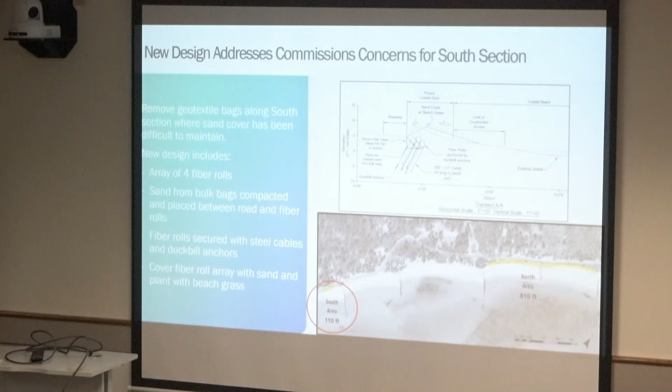We will take the sand out of the geotextile bags and use it between the road and the first 2 fiber rolls, compact it there, and use it as a buffer between the edge of the road and the fiber rolls. The fiber rolls will be anchored in place using steel cables and duckbill anchors. That's a typical way of anchoring them in place. And then once they're in place, then we'll cover them with sand, restore the dune, and plant it with beach grass.

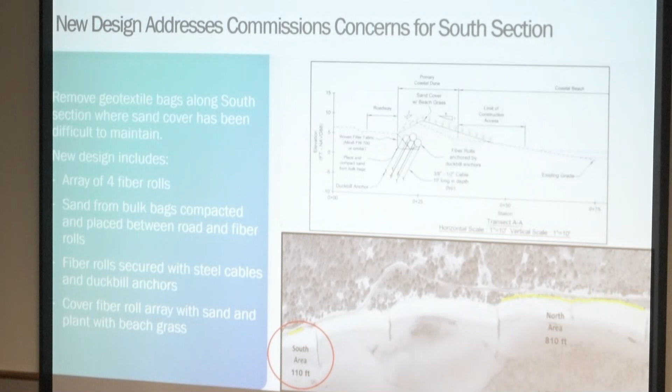A little bit on schedule, construction access, and resource area impacts. So Great Island Homeowners Association is planning to do this work to replace the geotextiles with the fiber rolls this fall. They do hope to be able to beneficially reuse some sediment that's being dredged from the Sweetwater Creek project, and they'll use that for the sand cover on top of the fiber rolls. That is a project that has been permitted separately by the proponents of the dredging project, and they do have permission to bring the material from the dredging project across the dune to Great Island Road. So from there, they'll place it in the pull-offs, and we'll use it to place on top of the fiber rolls, and also on the end of that northern section of the geotextiles, where there needs to be a little bit of cover added as well.

Construction access is shown in that upper right-hand graph. It's really essentially the same as what we did with the geotextiles—coming onto the beach from Great Island Road in that little red hatched area, and then working along from the beach to place the fiber rolls. So it's really identical to what we did before. Same with the resource area impacts.

So the fiber roll array is 110 feet long. There will be impacts to 2,031 square feet of coastal dune and 2,047 square feet of coastal beach. Those impacts to the beach are primarily from construction access out on the seaward side of the fiber rolls.

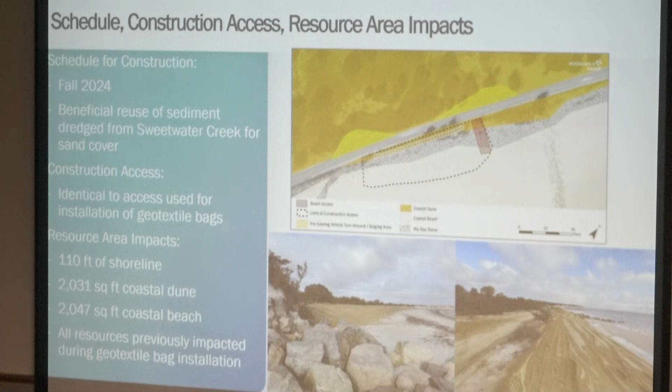In terms of future work, we are asking for permission to maintain sand cover over the fiber rolls and the geotextile bags to the north with up to 2,050 cubic yards of sediment twice annually. That would be compatible sediment with what's on the beach right now.

We are proposing a monitoring program where that sand cover would be monitored by staff there at Great Island regularly, and then after storms, Woods Hole Group will be out there monitoring and taking pictures. If we see the need for more sand cover, we'll note that and let the commission know.

And if there's any damaged geotextile bags, we wanted you to know that those will be taken out and replaced with something similar to the fiber rolls. We're not going to put any new geotextile bags in there.

And notices to the Concom will be provided before we do any of this work. So before we bring in any sand, before we take out any geotextiles, or replace them with fiber rolls.

I did want to spend a couple minutes addressing the comments in that Mass DMF letter that you got, that Brittany brought up last time. They had a number of comments or recommendations that you guys could include in your conditions, and we are basically complying with all but two of those. I just wanted to go through those and explain that to you.

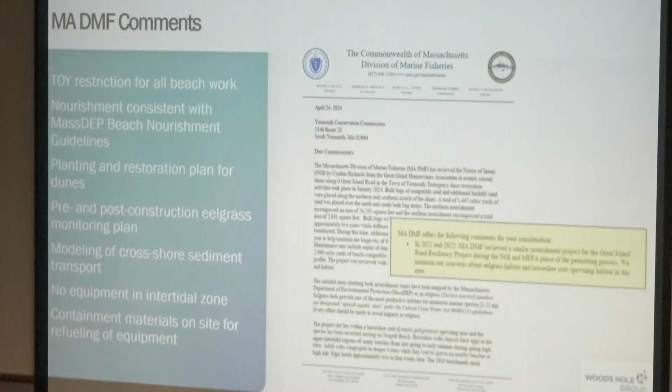So they were requesting a time of year restriction for all work on the beach from, I think, May 1st to July 31st. But we're having a longer time of year restriction to protect the birds. So ours goes from April 1st to September 1st. We're definitely complying with that time of year restriction, and then some, that Mass DMF wanted.

We're also complying with Mass DEP's beach nourishment guidelines, in that we're using beach compatible material to construct the dune, and we're monitoring and maintaining the project as it's been built.

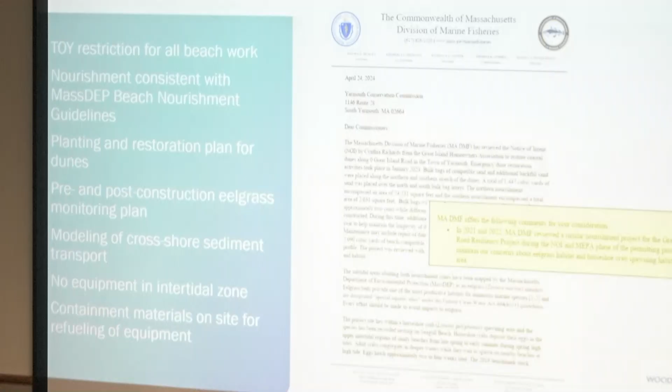We are, as I talked about, proposing to plant the dunes with beach grass. So we have a planting and restoration plan for those dunes.

I'm going to skip to the bottom two. We're also adhering to the comment that says there's going to be no equipment in the intertidal zone. We're not proposing any of that. It's all going to be above the high tide line.

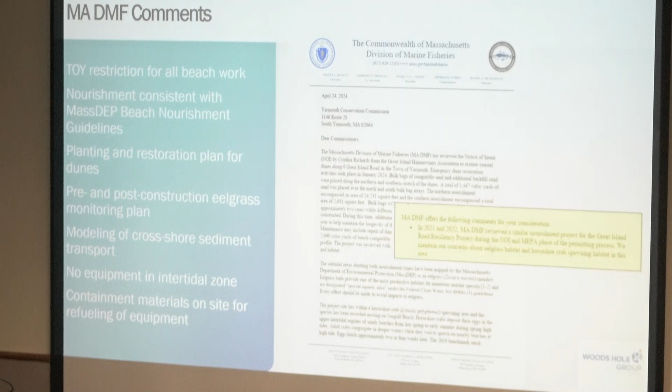And we're going to make sure that when the contractors come, if they are proposing any sort of refueling on site, that they'll have containment materials and supplies there in case there's a spill. So those are the ones we're complying with.

The two in the middle having to do with pre- and post-construction eelgrass monitoring and modeling of cross-shore sediment transport. The DMF comment letter indicated that this project is quite similar to one that the Commission saw back in 2021, the notice of intent for that larger beach nourishment project between Fox Point and White Cedar Point Road. And I think that the projects are really not similar at all.

That was a project for 77,000 cubic yards of material to be placed on the dune and the beach, so much lower on the beach profile. Here we're proposing a max of about 4,100 cubic yards a year, all to be held in the dunes. So we don't think there's the possibility of any sort of impact to the eelgrass.

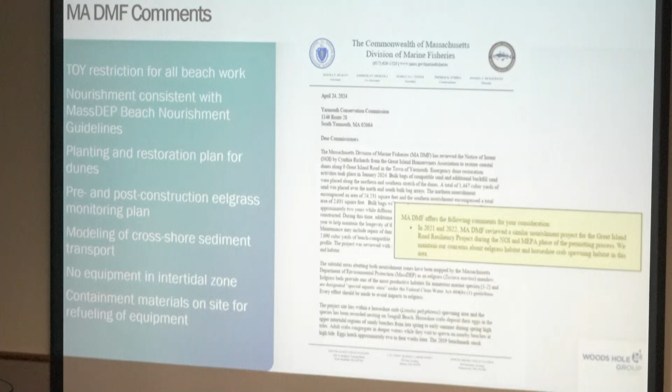The north section of this geotextiles at its closest is about 300 feet from the edge of the eelgrass that was mapped back in 2021 by the previous consultant. So given that big distance and the fact that we're not putting down anywhere near the 77,000 cubic yards proposed for that other project, I think that those two comments should not be applied to this project.

This is just a list of recommended conditions. I can go through this briefly. We're offering visual monitoring of the sandbags and fiber roll array on a monthly basis, inspection after storms, with reports to the Conservation Commission along with photographs so you can see what the site looks like.

We're asking for authorization to keep those sandbags and fiber rolls covered with sand, up to 2,090 cubic yards of beach-compatible material twice annually, if necessary. If not necessary, we're not going to do it. As I said, we're going to notify the Conservation Commission in advance of any of this work.

We've got that time of year restriction for any work on the beach between March 1st and August 31st. And again, if any of those geotextile bags become damaged, we're not going to replace them with geotextiles. It's going to be the fiber roll array.

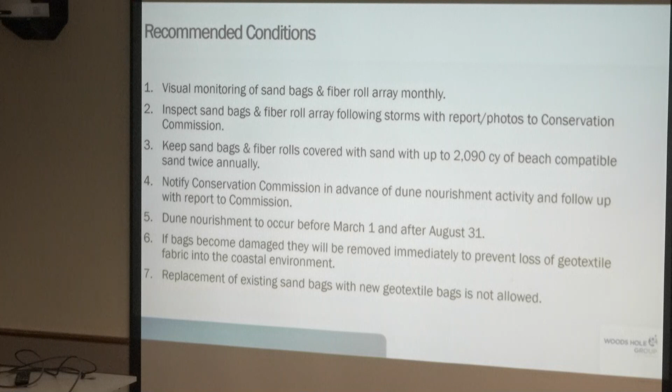So that's really it for what we're proposing. I did want to spend just 5 minutes with two last slides to address some comments that we heard from the commission last time we were here.

It has mainly to do with what we were hearing, that the commission was frustrated because Great Island Homeowners Association hasn't been moving fast enough to help address these resiliency issues. There's a perception of that. Hopefully we dispel or address that perception with this graphic right here.

What we did was group the work into 4 different categories. The blue dots on the left all have to do with that larger beach nourishment project between Fox Point and White Cedar Point Road.

Those consultants started that work, I'm going to guess, at the beginning of 2021. They filed an application with MEPA in June of 2021. They were issued a certificate from MEPA saying they did not need to do an EIR in July of 2021.

Then they filed a notice of intent with this committee or this board in October of 2022. They did receive a denial, then appealed it to DEP and received a superseding approval in July of 2023.

At that point, the Great Island homeowners stakeholders felt that they really learned a lot by going through the process of MEPA and this notice of intent filing. One of the things they learned is that they really need to take a more holistic approach to finding a way to build resiliency for this road and access to their homes.

So not only do they need to look at how are they going to address erosion, like that beach nourishment project was addressing erosion and damage of the road because of erosion, but also flooding. And not just flooding from Nantucket Sound, but really flooding from Lewis Bay, so from the north. That's one thing we found, that that's really the more significant source of flooding, not from Nantucket Sound, but from Lewis Bay and the north.

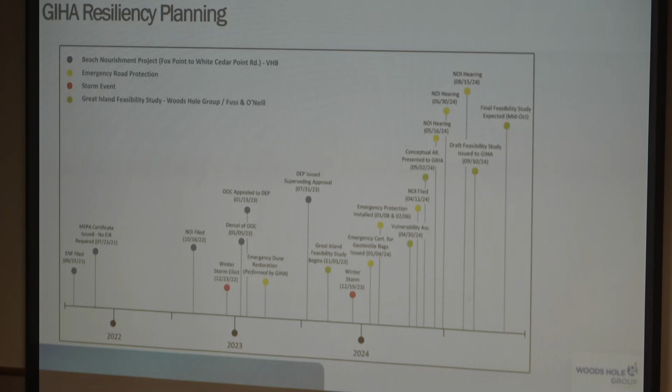So they decided that they wanted to step back and take a more holistic approach to looking at the problem and building a plan for resiliency. So they hired Woods Hole Group in November of 2023.

So now we're looking at the green dots off to the right. That was 10 months ago. They hired us, and we first completed our vulnerability assessment in April of this year.

What that did was just look at the roads and provide the stakeholders maps showing probabilities of flooding and when they can expect flooding. What we were able to show them is that right now the roads are vulnerable to flooding during high tides, and that definitely gets worse as we move forward in time with sea level rise.

So by the time they're at 2030 and 2050, they're going to have impacts from flooding on that road daily. So we were able to demonstrate that to them.

And then by May of this year, we presented a bunch of conceptual alternatives for addressing resiliency, and then we just issued the draft feasibility study to them in September and hope to be able to produce a final report in October.

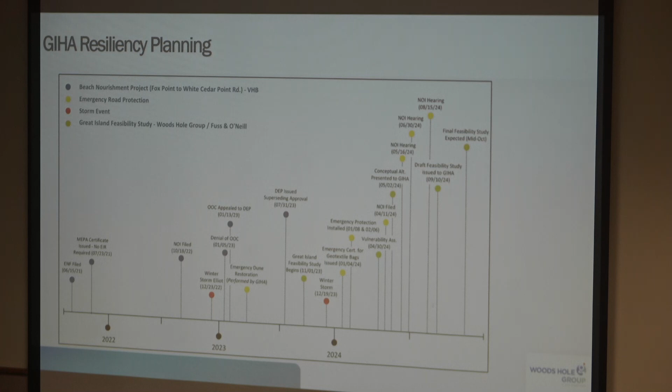In and amongst all that work on the feasibility study, we had the storms in December and January of last year. We got the emergency certification for putting in the bags and trying to protect the road, and then filed this notice of intent. So there really has been quite a lot of activity.

I think one of the things that Great Island Homeowners Association has learned through the course of our work is just how vulnerable really that road and access point is. They are committed to doing something because we've been able to demonstrate that it's a serious problem and it's coming soon.

They really have no choice, and they've come to really understand that. So that's been one of the benefits of doing the study, I think.

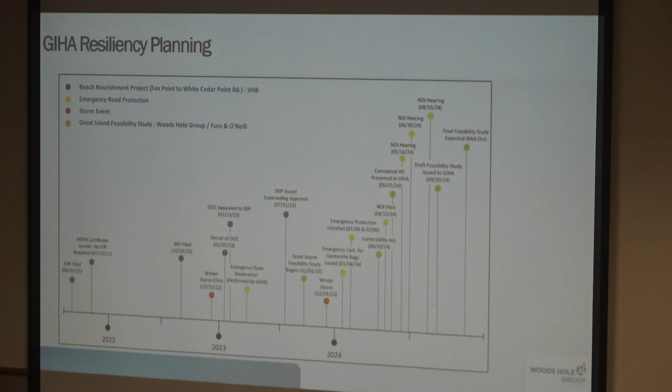And then finally, this last slide gives you a glimpse of some of the recommendations we made in the feasibility study. This near-term solution is one that we talked about last time we were here at the meeting, and it's really for the next, say, 1 to 5 years. So what that is essentially, filing what we're calling a proactive notice of intent with this commission for emergency roadway protection as needed based on the dune erosion.

So if we have dune erosion like we saw last winter in an area that has a dune right now that's protecting the road, then we're hopefully going to have an order of conditions in place where we can come in and install this fiber roll system that you're seeing tonight for the south section, cover it with sand, and plant it with beach grass. They would also stockpile some of these materials on site so they would be able to implement these solutions right away and not have to worry about supply chain issues.

That particular near-term solution is intended to protect the road from damage caused by erosion until this mid to long-term plan can be implemented. So we're guessing 1 to 5 years, and we're hoping to be able to file that notice of intent with this commission this fall.

The other recommendations were for mid and long-term resiliency: to raise sections of the road to 4.5 feet in NAVD88 and rebuild the bridge. A second recommendation was to relocate the road further landward and elevate sections of it to 7.5 feet in NAVD88, and also reconstruct the bridge.

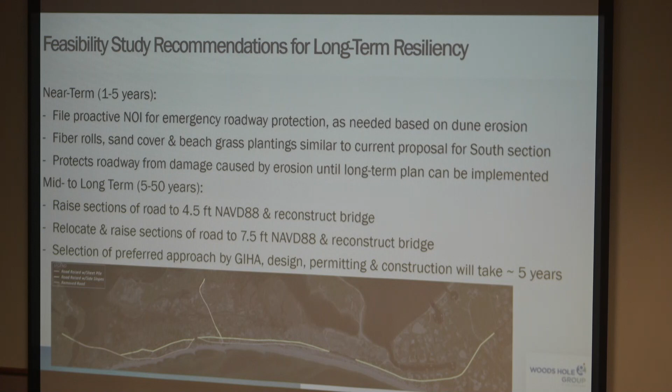The solution they select will probably be a combination of those two mid and long-term solutions. But that's what we've presented them with, and they are and will be in the next coming months, as a group, selecting what path they want to move forward on. I'll remind the commission that it's a group of 43 homeowners, and it takes a while to make a collective decision.

Everyone's got to contribute to the funding. The projects, either one of those mid to long-term projects, are incredibly expensive — millions of dollars, tens of millions of dollars. So they've got to figure out how to fund it, and everyone's got to be on board with it. Again, they're committed, and they have no other choice, and they know that. So they are going to make a decision.

Once they make that decision about what to go forward with, then it's got to be designed, permitted, and constructed. So we're estimating all that — everything on that road — is about a 5-year process before we can then sort of stop with this near-term, sort of emergency road protection solution.

So that's the plan moving forward, and we wanted to share a little bit of that with you so that you hopefully understand the difficulties, and that they are moving forward and working together and committed to implementing some solutions here. I'll stop with that.

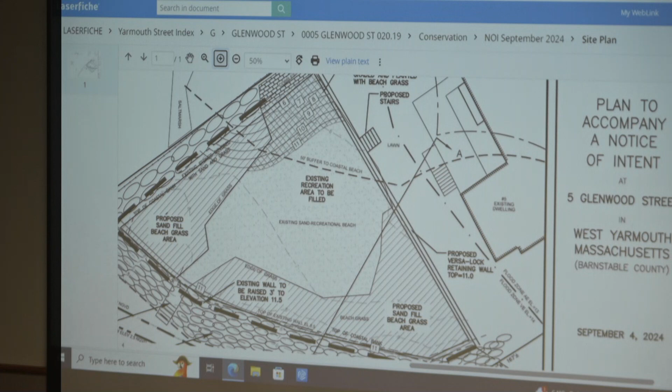Would these be new cobbles near the tide gate, or are they existing? Those are the existing ones. They are there.

Those are all my comments, but this does require a variance, and I would recommend not allowing a new structure within the velocity flood zone. Fill is generally avoided in the velocity zone except for dune or beach nourishment, and since this is above a revetment, it wouldn't really be dune or beach nourishment. I recognize you'd need a certain amount to support raising the elevation of the revetment, but anything additional would be stretching our current regulations for the velocity flood zone.

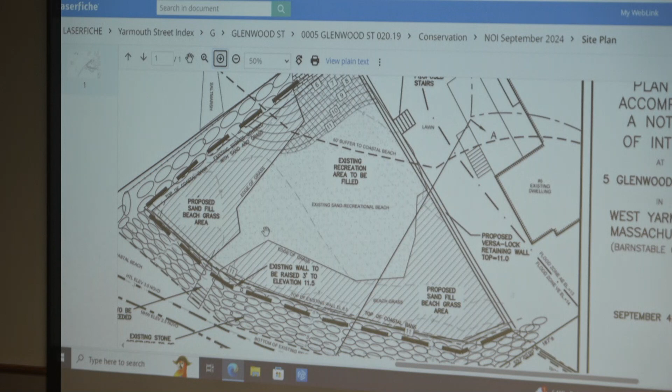Those are all my questions. So you said a variance would be required for this back wall and the stairs, because they're both located within the velocity flood zone. You also mentioned stretching the regulation? Well, fill should generally be avoided in the velocity zone, but some would be required to elevate the existing revetment. The rest proposed for flood attenuation in this yard would not be consistent with our current regulations.

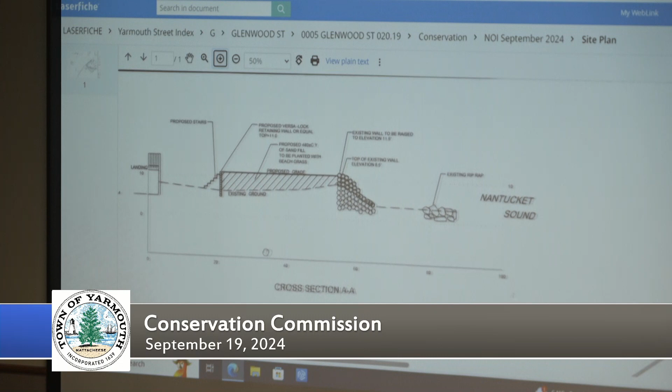And you said the slope goes down towards the house from the wall? Yes, if you look at the section on the top left of the sheets, you can see the existing ground right there, so the reason for the proposed grade was so that if there was any wash over the wall, it wouldn't drain towards the house. There is a low spot and then it does go back up towards the house again, but depending on how that floods, that's the reason for this flat area, to stop the water going straight towards the house.

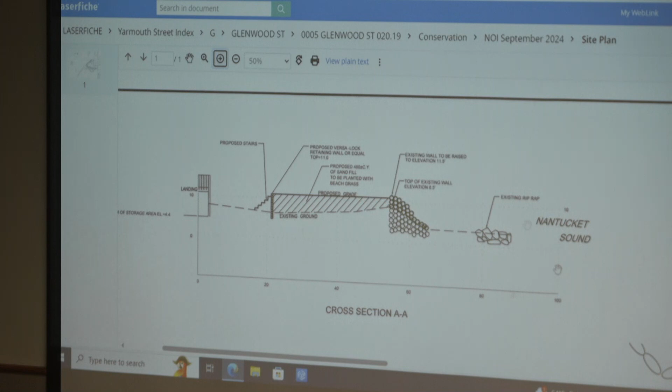Why sand and not some plantings? It seems to me that the first time you have a washover, all that sand is going to make its way someplace, and then you have to replace it. We have proposed a sand-filled beach grass area, so the majority of it is beach grass. When I was out there, I got the feeling that the existing sand recreational beach area is quite large.

What's there today is large, yes, we're cutting that in half basically by planting on the left and the right. The current area has very little beach grass. That hatched area is all sand-filled with beach grass on top, so we're reducing the overall area by about 50%. Where the crosshairs is right now, that's currently sand, and that would be sand with beach grass, is what we're proposing. But the middle still would be sand. The middle would still be sand.

So my question still stands, the sand still has to go somewhere if it's flooded, which it will be. With the area being flat and the beach grass adjacent to the wall, there's going to be a lot less water coming over the top. Not less - the same amount of water coming over the top, but it will be less destructive because of the beach grass there. And by adding 3 feet to the wall, we're hoping to reduce the amount of water that comes over. That's all I have. Bradley?

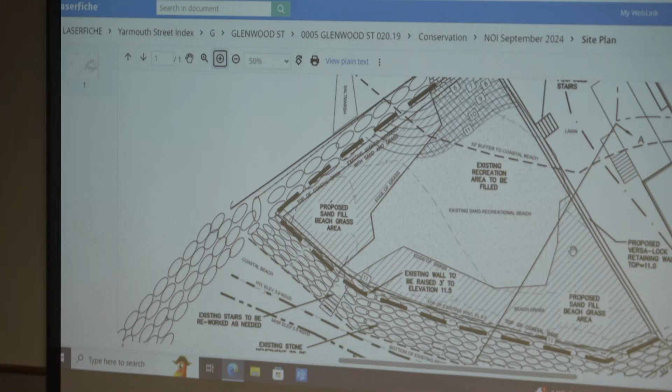I don't think I have any additional comments than what's already been said. Okay, thank you.

Jack? Well, I think we're in a situation where we're trying to do something to get over the hump for the next 5, 10 years, and we really should be planning for the next 50, but we can't really do much about that at this point. And by that I mean raising walls a lot more than what we're even talking about. This place could be gone in a really big storm. So if you can control your own anxieties about the possibility of large storms coming, that's great.

So I really don't have any, well, the one thing I would suggest is probably more beach grass area, like you're saying, because even with that one little portion, if any waves get in there, they're going to disperse and spread out and just wipe out the beach grass that you have there. So I don't know if there's a solution about that, except for putting all beach grass in, except for a path.

Okay, thank you. Pat? I kind of agree with Brittany in the fact that we just made these new regulations about not putting walls in the velocity zone, and this is a velocity zone. And it's a beautiful spot, and I understand wanting to protect it, but...

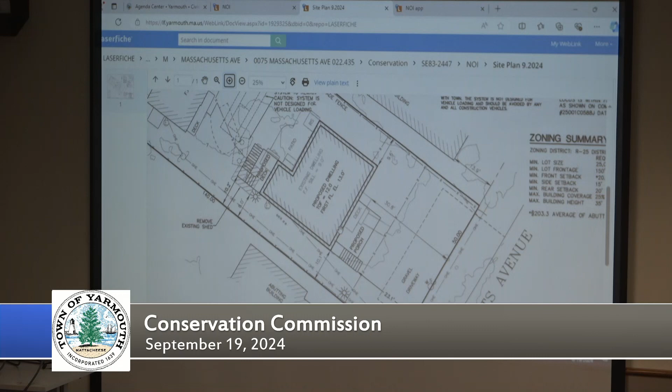Good evening, for the record, Danny Gonzalez, professional engineer with Down Cape Engineering, on behalf of Scott McKeon and his project at 75 Massachusetts Ave. There are two existing dwellings on this property. Right now we're proposing just work on the front dwelling. We're going to lift that up, put a new flood zone compliant foundation under it, as well as expand some deck areas in the front and back. We are in land subject to coastal storm flowage, FEMA elevation 11, so the new foundation will meet all requirements, and we are not proposing any fill at this time. Happy to answer any questions you have.

Brittany: The only thing I had is to make sure flood vents are in the foundation -- it said foundation planned by others, but we'll probably just add that as a special condition, given it's in the floodplain. Also curious why they're choosing to do only one of the two dwellings. Engineer: I don't know for sure, but I suspect it's just a financial decision, cost phasing.

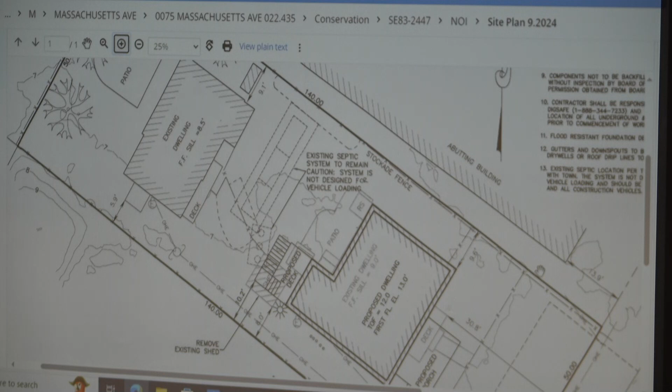I'm just curious, did we have something on this property years ago? I am unable to answer that question. So I'll answer it, yes -- there was an order of conditions issued to raise both of these dwellings, and we will close that out prior to starting construction on this one. Good that I can remember that. Thanks, David, I'm really impressed with myself.

Okay, nothing else, Brittany? No? David, anything else? No? Patrick?

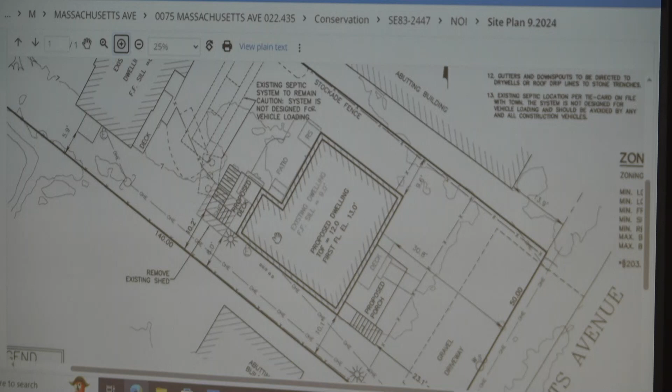I see there's the proposed porch and the proposed deck. Both look like they're being expanded from what was originally there. I haven't done the math to know how much expansion, but I was wondering if there's any concern about those additional footprints beyond the exterior of the house.

Since this is just the floodplain and the whole lot is developed, they're replacing lawn right now. In general, with projects increasing the foundation, there's a lot of fill, and that's what we're most concerned about -- that's when we require plantings and stormwater evaluations. But since they're using stairs, which we greatly appreciate, instead of fill, we don't have mitigation requirements for an increase in footprint if it's just in the flood zone. There's also no trees present. If there were trees present on a flood zone property, we would ask that they replace trees taken down for additional footprint, but they're not, so in this case it's okay.

Thank you. Jack, anything? Just that we include the flood vents. Everything good? Anyone in the audience? Anyone on Zoom?

Can I have a motion to approve this project with the condition of including the flood vents? I'll go. Jack, I'll second. Second, Pat. All in favor? Aye. Opposed? Passes unanimously. Thank you very much for your time.

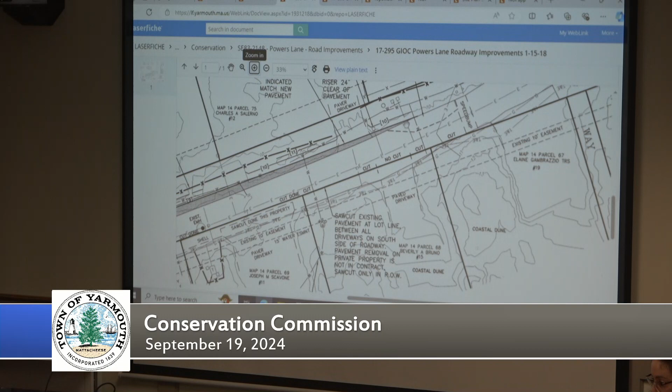It's pretty clear to me that was paved recently, within the last 6 months, maybe or less. Something in front of, I don't have any way of showing you right now, but it's in this area behind.

Which direction is this? Can you see the little hand and the speed bump? On this side of the speed bump, there's brand new pavement, or newish looking pavement, that is above the elevation of the existing roadway. But I don't think we have anything else to discuss at this time.

Just looking for an update. We'll issue a revised enforcement order with the same requirements, but a check-in at the hearing in 2 months.

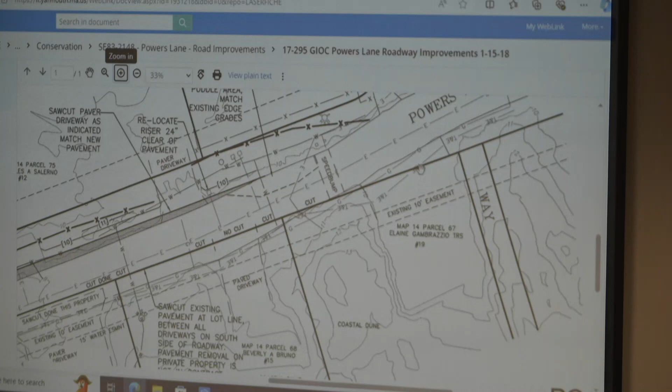And what does that entail, though? I'm just trying to make sure I understand, so I can go back to the board and explain it to them. So what does that actually...

It can be as simple as you coming back saying you pushed and you shopped around for surveyors and no one is available sooner, or with a date where the survey will be available that you will provide us.

Okay, because we already hired Downcape. So if you could provide... Downcape to start taking care of these problems of flooding, is that what you're saying? To take care of this order of condition. This one? Yeah, okay, for this one. We've already hired them. So they did the engineering and everything.

Do we need a vote to revise and issue a revised enforcement order? Yes, as discussed. I have a motion to that effect? Bradford motion. Second? Jack second. All in favor? Aye. Opposed? Passes by the majority. Thank you very much for coming in.